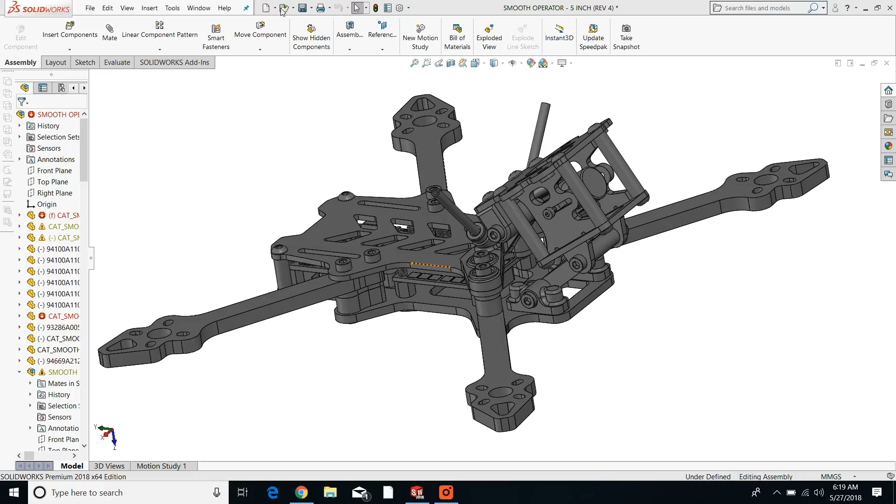Hey guys, this is Neil with Catalyst Machine Works, and I'm going to discuss some of the design aspects of this new bird that we are actively tinkering away with.

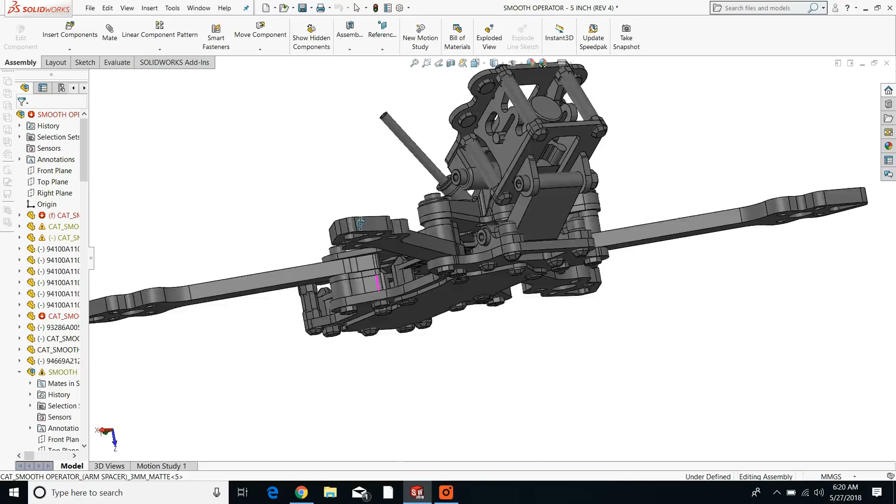Currently it's only in CAD form, we haven't started to manufacture anything. The prototypes are coming soon. I'm probably going to finish up this design by the end of this holiday weekend, get the parts cut for a few prototypes, so myself and team pilots can go thrash this thing and see what happens. So I'm going to discuss the major design aspects and what I'm trying to accomplish with this.

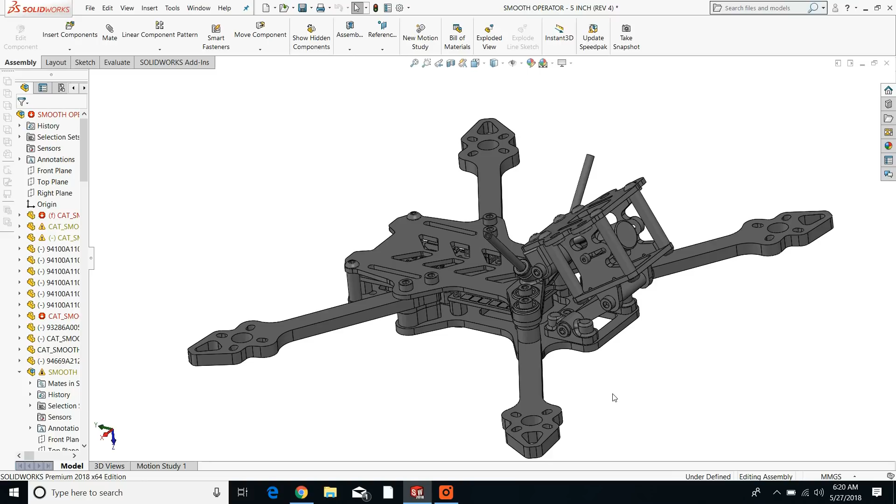One of the main aspects is I wanted to create a design that is highly resilient to damage for your expensive FPV camera and also the HD camera that's going to go up top.

Let me go ahead and show you what it looks like with the HD camera up top. I need to get a new computer, it's not keeping up anymore. Anyway, so this is what it looks like with a session up top.

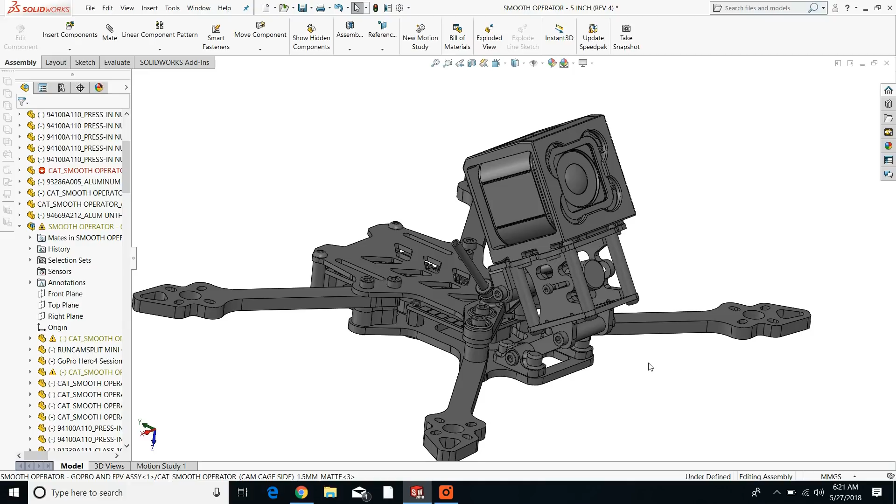Now the theory here, how we're going to keep these two cameras well protected, has to do with TPU and the amazing properties of TPU. That material, the reason frame designers use it primarily is, one, it's readily available, and two, it has some pretty incredible properties with regards to crashing.

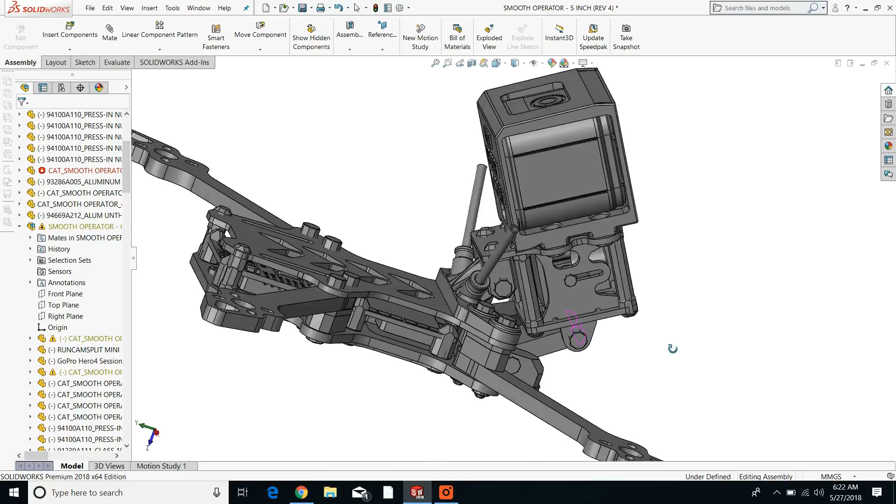What happens when you crash is that the material will move, deform, but bounce back into shape. So it doesn't plastically deform, it doesn't deform and stay in that deformed position. It'll sort of pop back into spot.

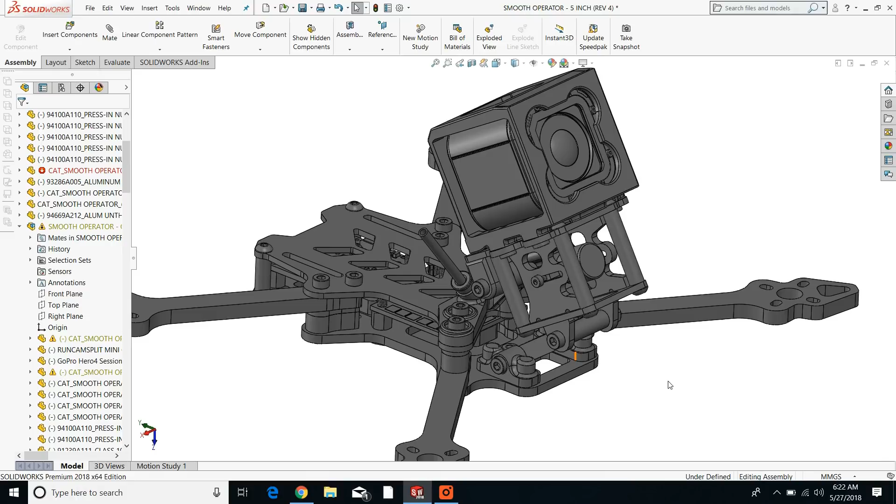And so I'm using those properties with this assembly. Let me go ahead and hide these guys so we can have a better look at this.

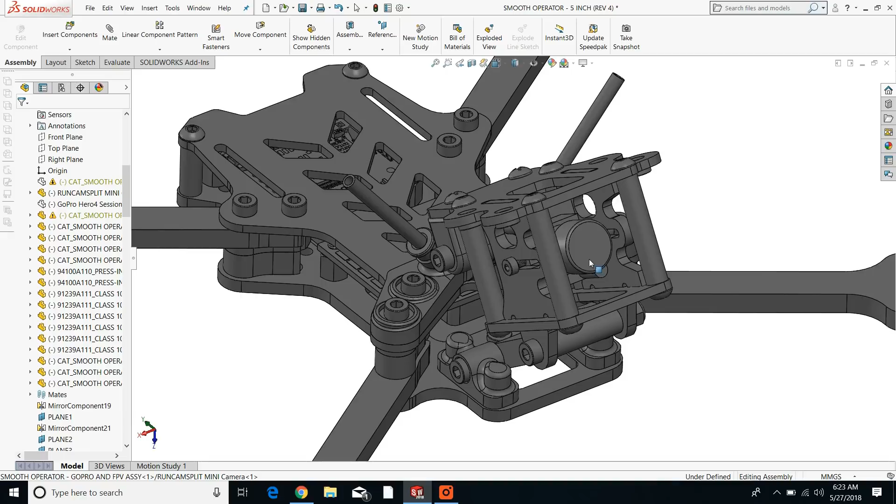Now how this thing works is it has a very rigid, very strong cage here for the FPV camera, and this is a micro cam in here. So this thing will fit really any size micro cam on the market, and in addition you can use ones with big lenses, like the Eagle camera for instance. So it's designed for that.

And this cage is mounted to the main structure by TPU components. So this bracket, these two brackets here, these are TPU. This bar will probably be TPU. We may use a material called armadillo, which is unbelievably tough, it just depends, I'm going to try both out.

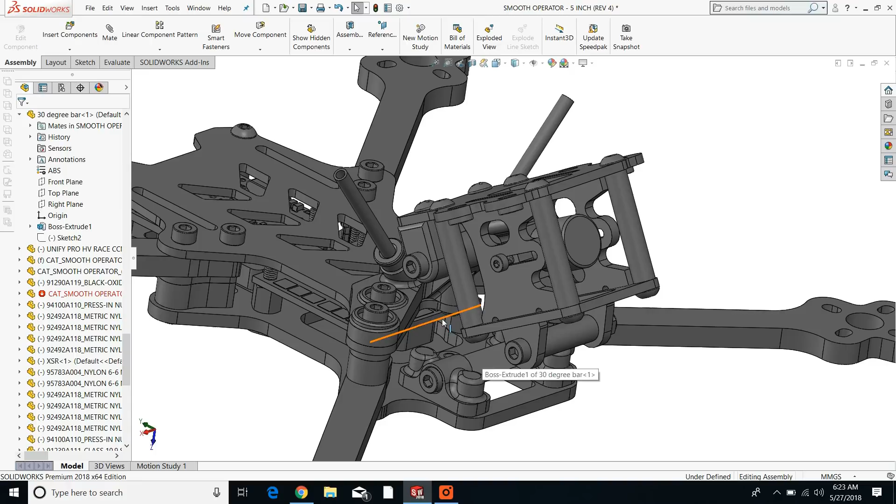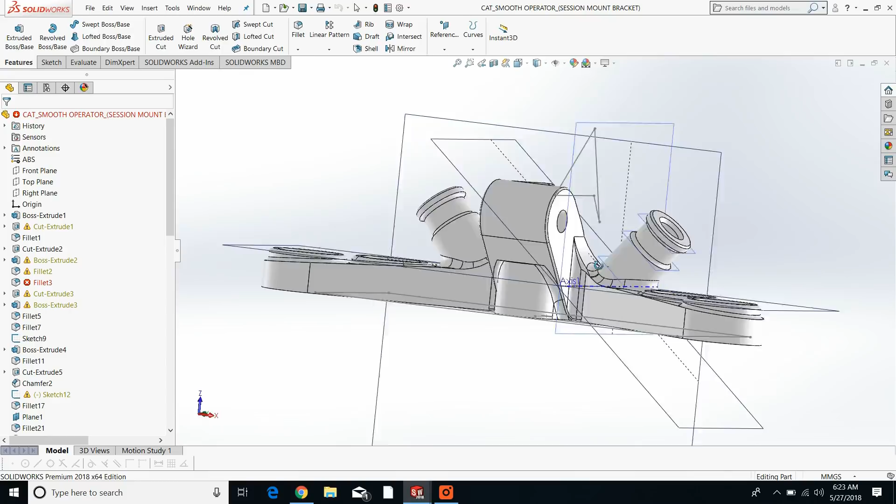But then this component here in the back, that the assembly hinges on, let me show you what it looks like. This component is also TPU. I've got a lot of planes and whatnot on here, but this entire component is TPU as well.

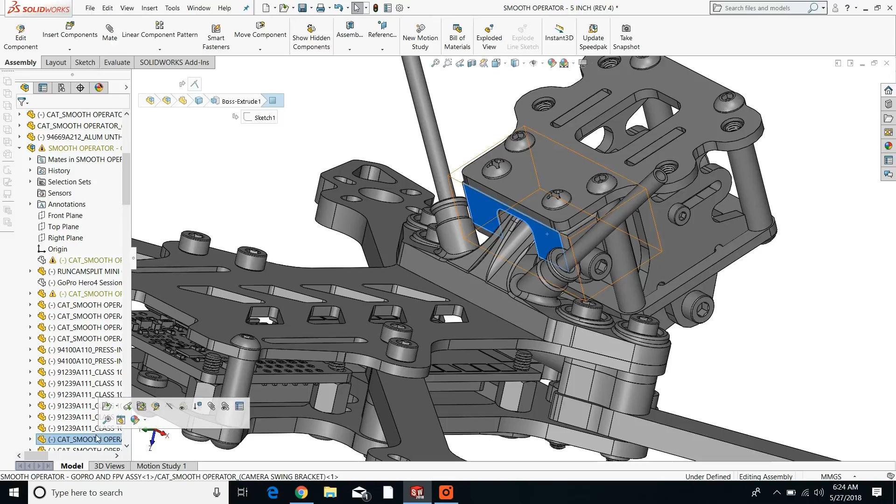Then this component that I haven't even named yet, whatever this thing is called, that the assembly hinges on, this is also TPU. Let me open that up. Okay, so this is TPU as well.

So how it works is that if we crash, let's say we smash this cage into something, the theory is that all of these components working together are going to deform and just move this cage out of the way. It'll essentially deform, dissipate the forces, and then sort of pop back into place.

Of course we don't want things in the process to be breaking, and that's what crash testing is for. So I've designed it in such a way that my intuition is telling me it'll be successful with the majority of crashes, and that it'll do what it's supposed to do. So we're going to get out there and crash test it and see what happens.

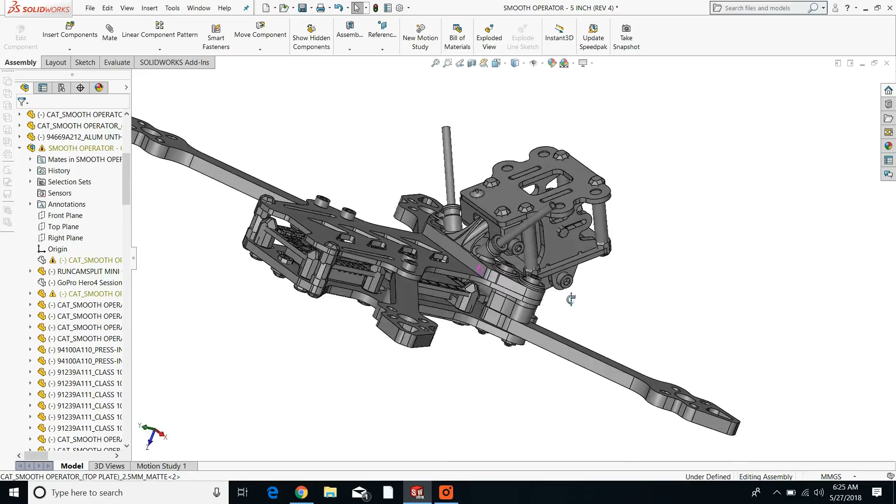Now, why didn't I go with just a big TPU canopy of some sort up here?

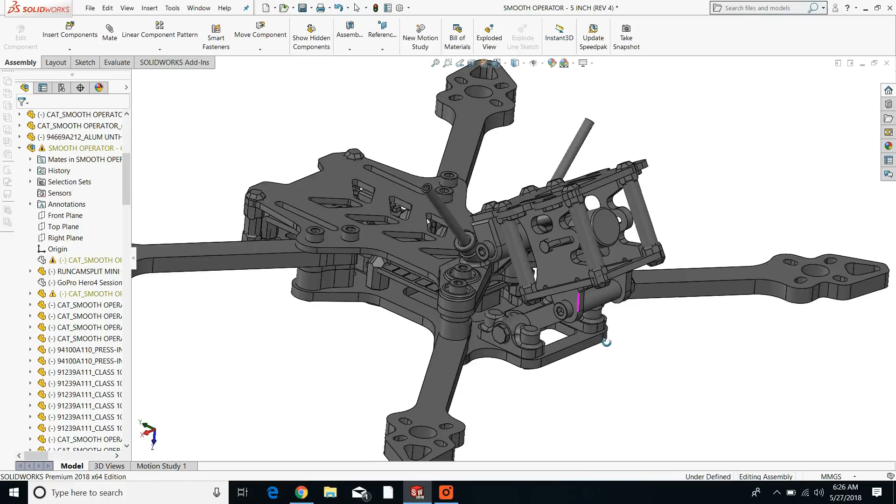We've considered that, and the reason I didn't go with that is that while a TPU system to hold the cameras can be effective, I think this is actually going to be more effective. What I've found is that a TPU structure is really great most of the time, but there are those cases where it deforms so much that it'll actually crack the case of the FPV camera, and that can be a problem.

So the theory with this is that we now have some of the properties of TPU working to our advantage, that deformation and being able to move the assembly out of the way in a crash. But we're also housing the camera assembly in a very tough cage. So that's the theory with that.

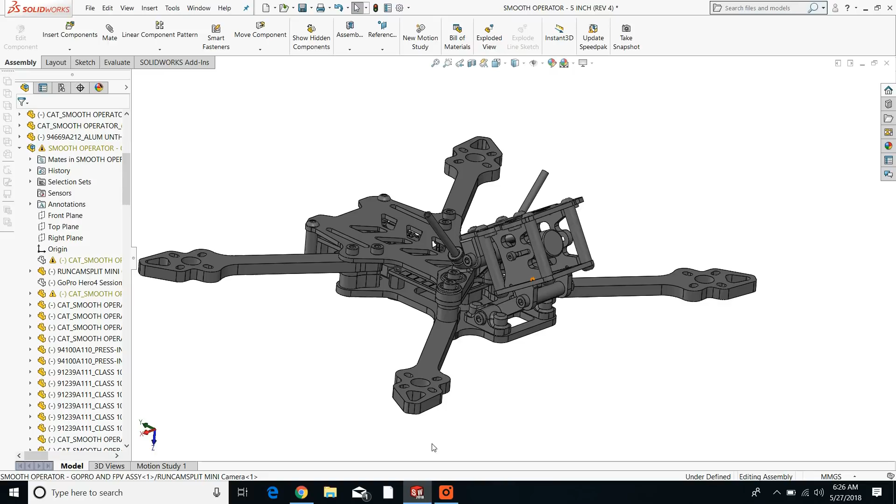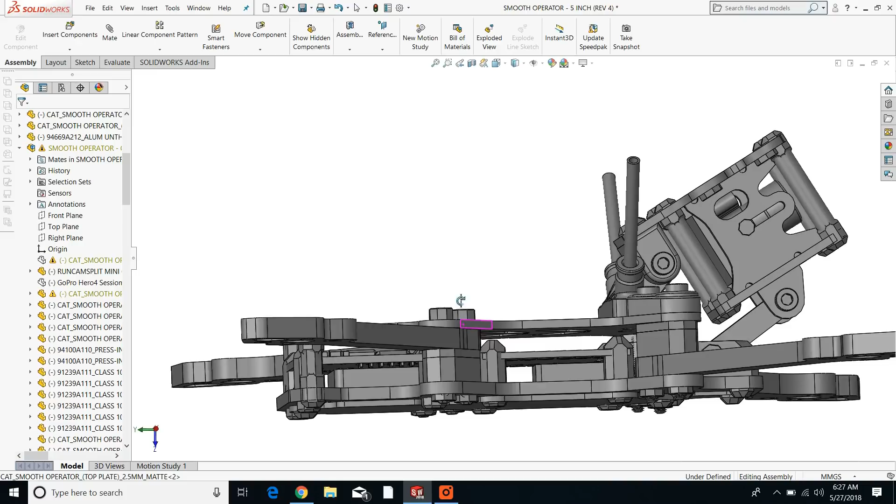Now, the other aspect of this machine that I wanted to go after was a super low deck, a fuselage that is very low slung. They just look cool, it looks really awesome, and the less distance you have from the top and bottom plate, the tougher the fuselage is going to be in a crash. And obviously you save a little bit of weight compared to something with tall standoffs and all of that.

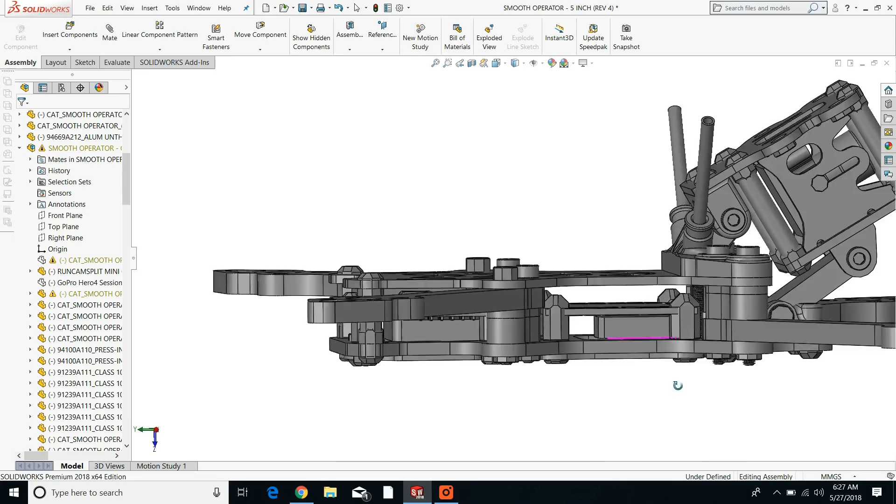So anyways, the way that this is accomplished, this is 13 millimeters top to bottom, and there's actually only one way that I was able to pull this off and get it so low slung, and that's this here.

This on the bottom is essentially just a cover plate, carbon fiber, 1 millimeter thick. If you look at this thing, it's held on with 2 screws, right here. You pull those out, this cover plate is going to come off.

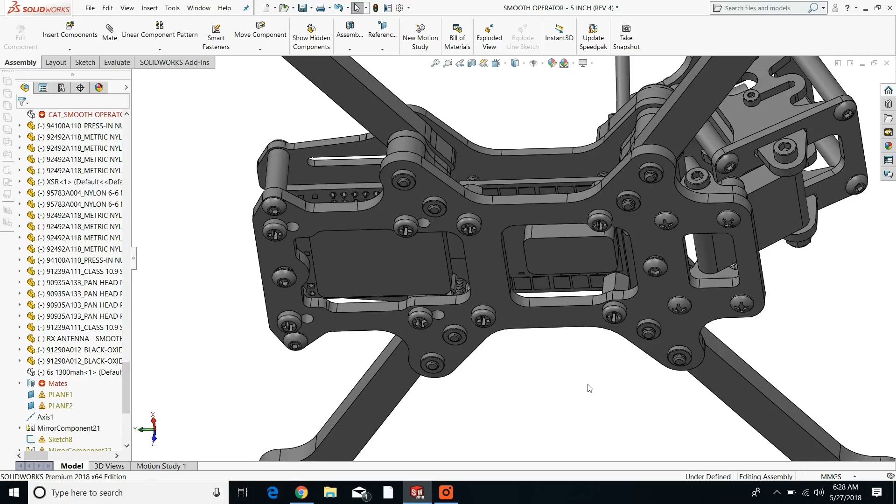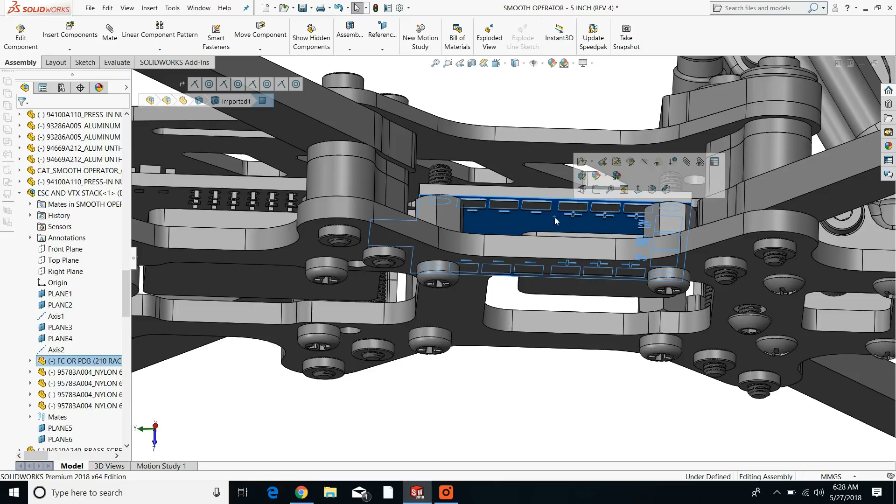Then underneath, you've revealed the video transmitter, which is here, and the RC receiver, which is there. Those are mounted in these, I'm going to call them bays. This is the bottom of the speed controller, the 4-in-1 ESC, and this is the bottom of the flight controller. You just use double-sided stick tape and mount them to there. There's plenty of room for these components.

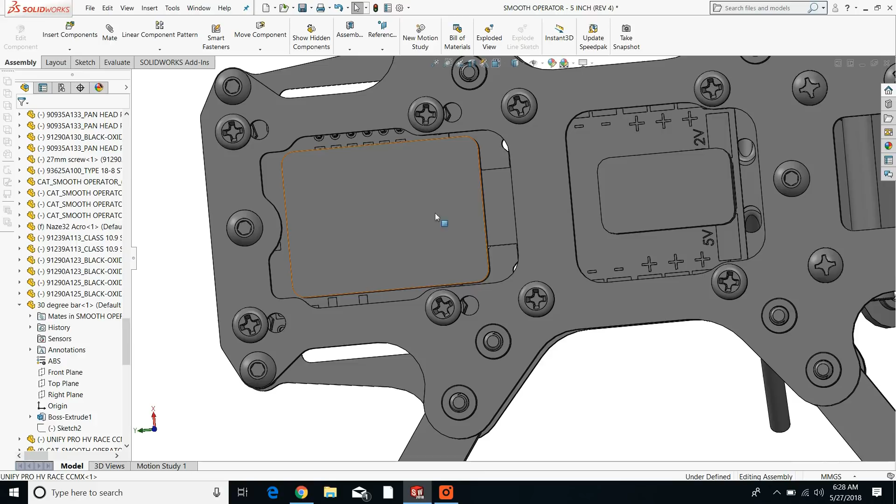This I've modeled up here is a Unify Pro, the race version, but it's the big one, the new one they came out with, the MMCX. So you can see it's pretty long, it's a big, flat, massive thing, and it fits in here with no problems. And of course you've got plenty of space for pretty much any receiver you can think of.

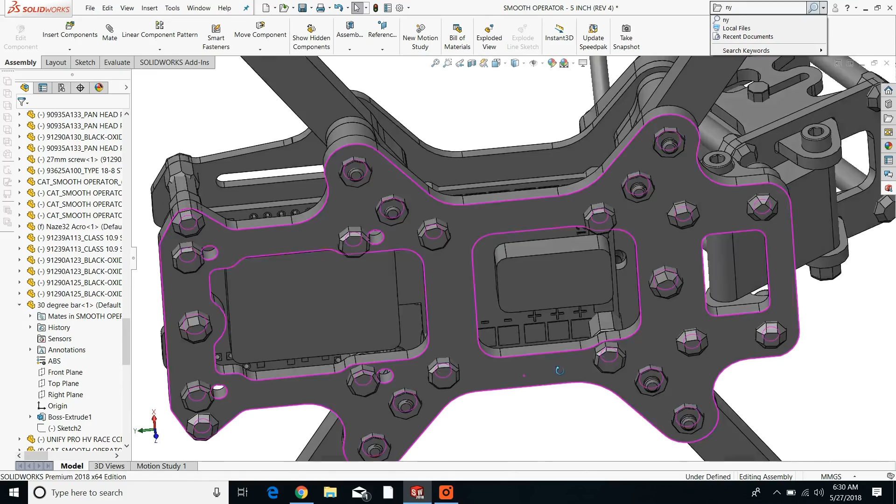One of the concerns that I've heard from people in our group who have seen this thing is access to the electronics. I mean, obviously that's really important. We go out and thrash these things, and the reality is things are going to burn up over time, and things are going to break, and you've got to get access to these components.

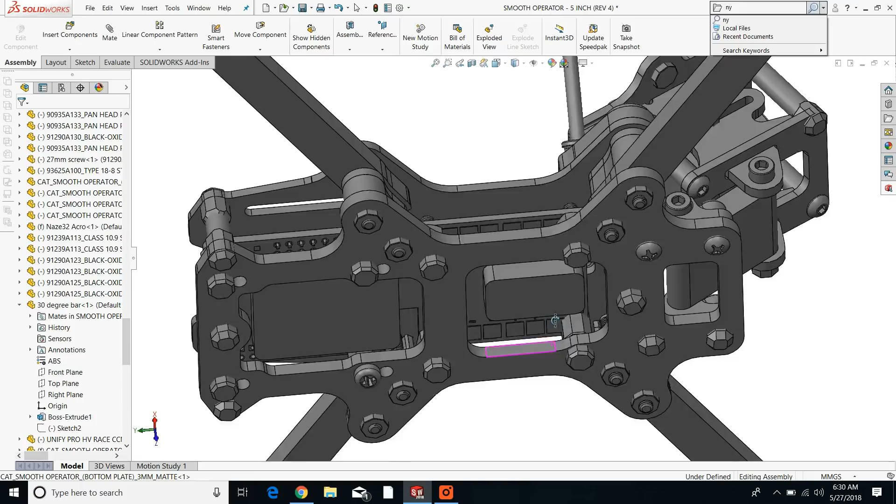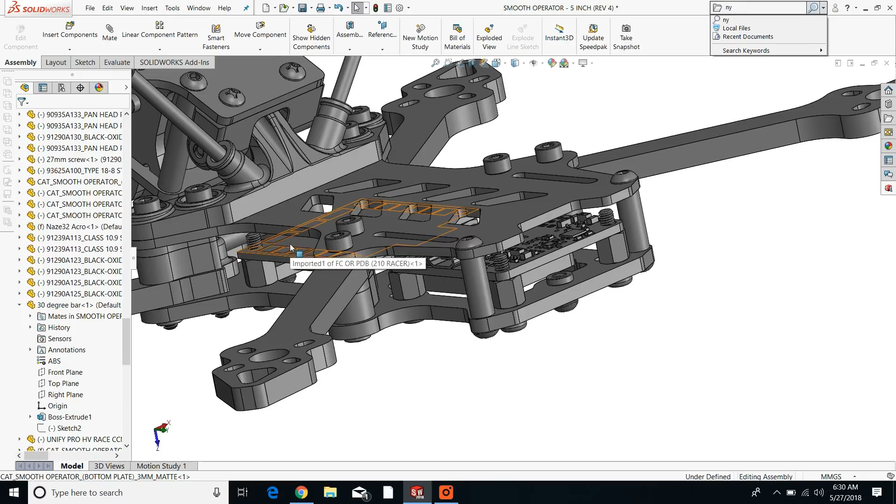So the intention of this, the way this thing works, is that it gives you easy access. Just 2 screws, and now you have access to these components. You've got access to the flight controller, not by way of these openings here, but just by where it's located — the flight controller is in the rear of the craft. It's not stacked on top of the ESC, it's not in the middle, it's in the rear. So just by way of its location, you can see that you can get to it easily.

Let me go ahead and put this cover plate back on here, wherever in the hell it is.

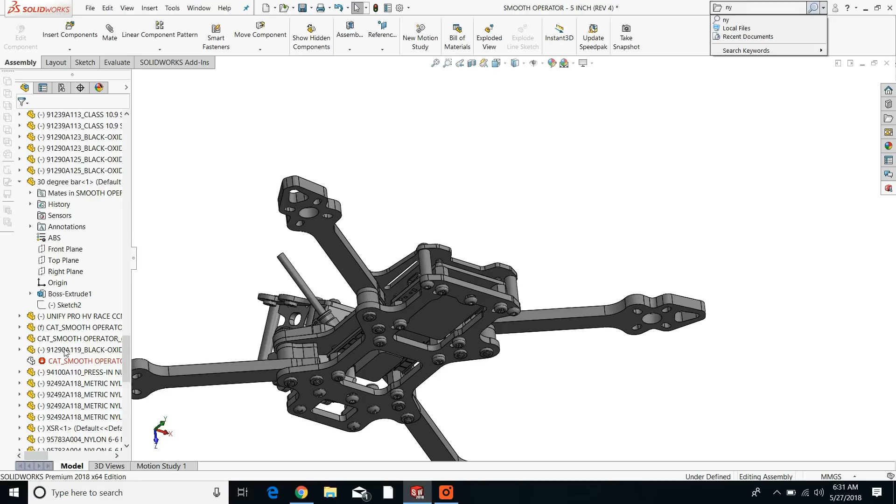Here it is. All right. Okay.

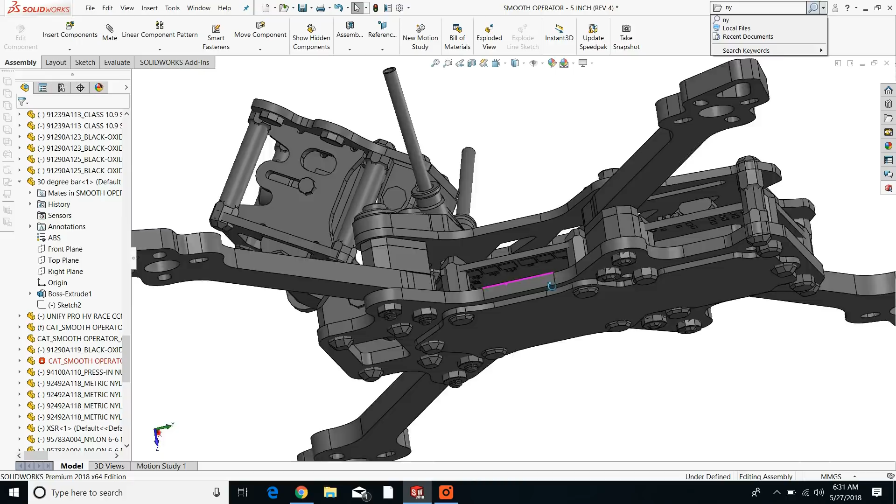So another aspect I'm going to discuss is the arms. Essentially this is an adaptation of the Merica line of frames. Through testing, and then once we got it out into the world and people started crashing it and doing all that, we found that the way the arms work and the way the fuselage interfaces with the arms just works out really well. It's a very popular design, so we're continuing it in this frame. It really hasn't changed - it works the exact same way.

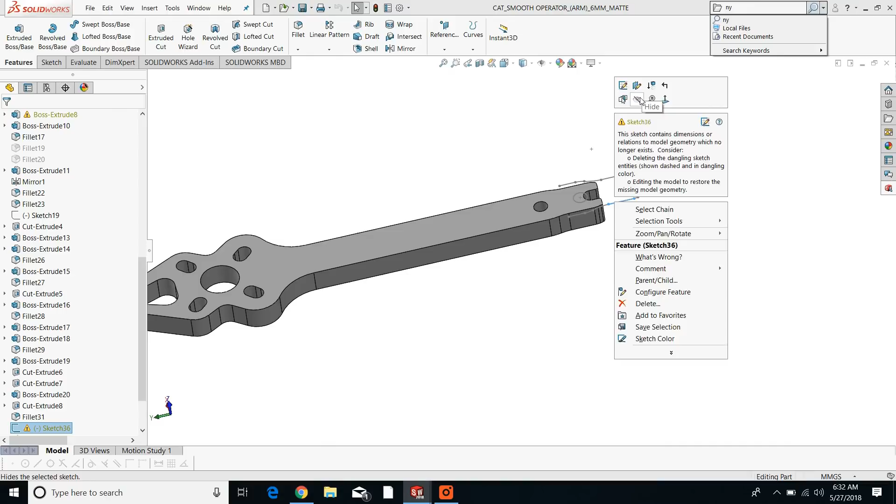So we have the arms here, and if you look at the arm, let's hide this thing - it's got a hole and a slot, like that. So if you break an arm, if you snap one of these arms, all you've got to do is take out this screw, completely remove it, then just loosen this screw and the arm comes out. It's super fast, super easy to get out of there.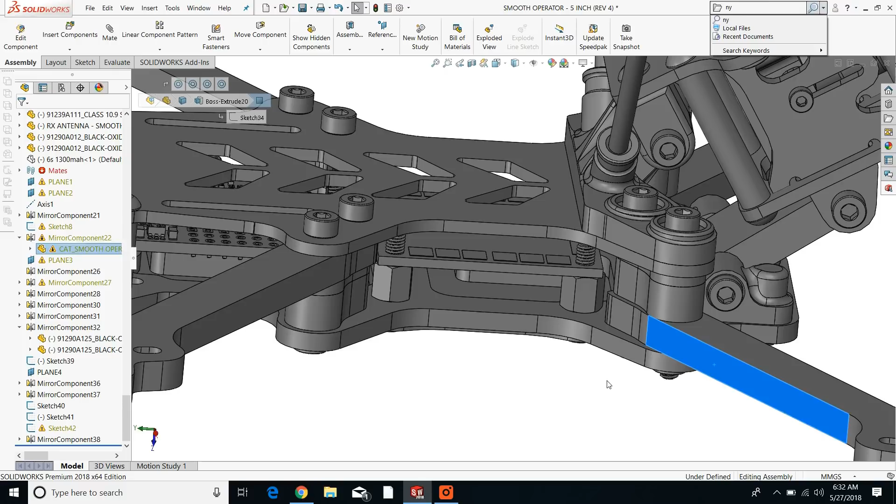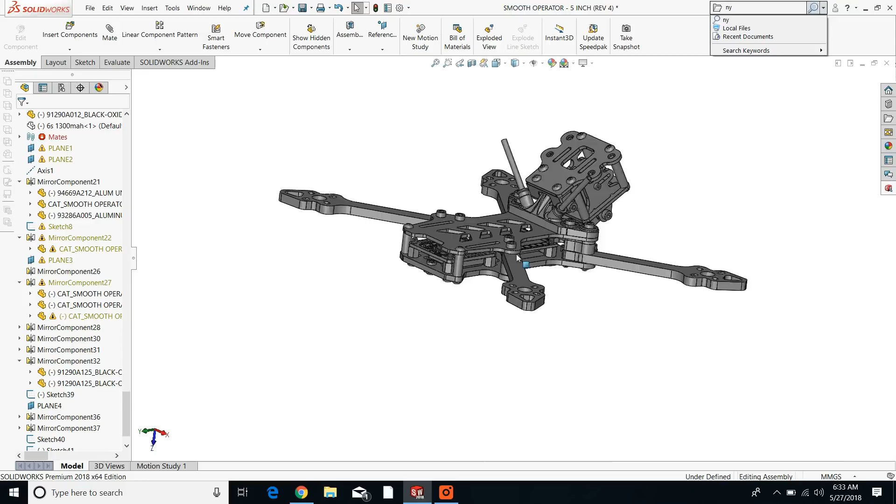Another aspect that makes this thing cool is that we use these carbon fiber arm spacers, and that allows you to get a staggering of the front arms in reference to the rear arms. So you can get the props of the two rear motors up higher than the front, getting cleaner air to the rear props and running a little more efficiently on those. That is how that works, and it has not changed from the Merica frames - it should be very effective.

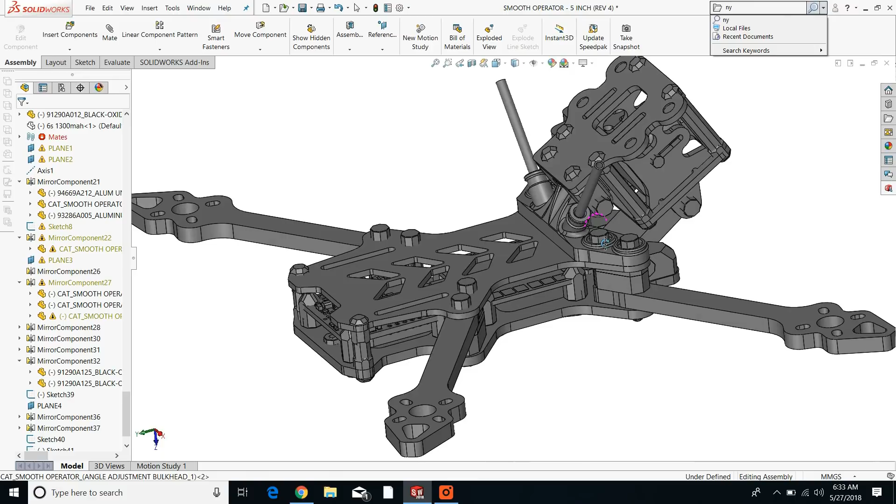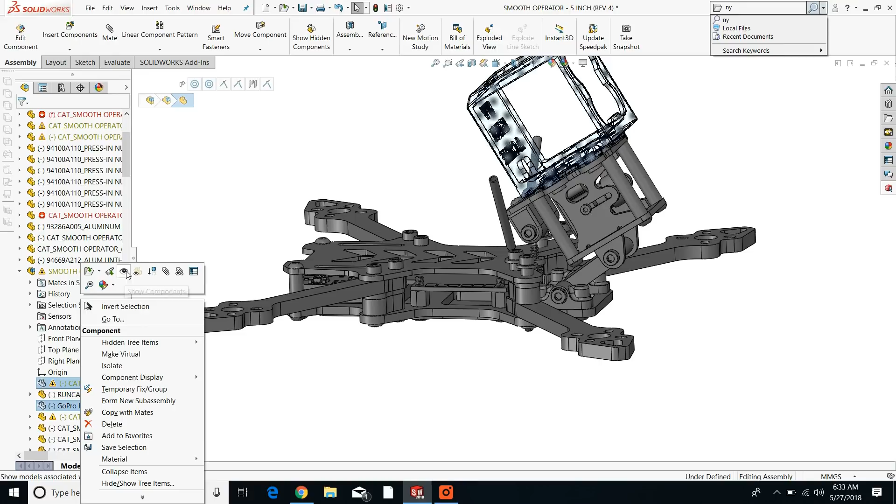Now, obviously, the battery on this guy is mounted on top. Another thing I noticed people mentioning is, wow, why does this top portion look so high up? Why is it sticking up so high? Well, it's not really sticking up higher than any other craft in this size.

The reason it looks like it's sticking up so high is - oops, we're missing a part here - the reason it looks like it's protruding up so high in reference to the other parts of the craft is that the deck sits so low.

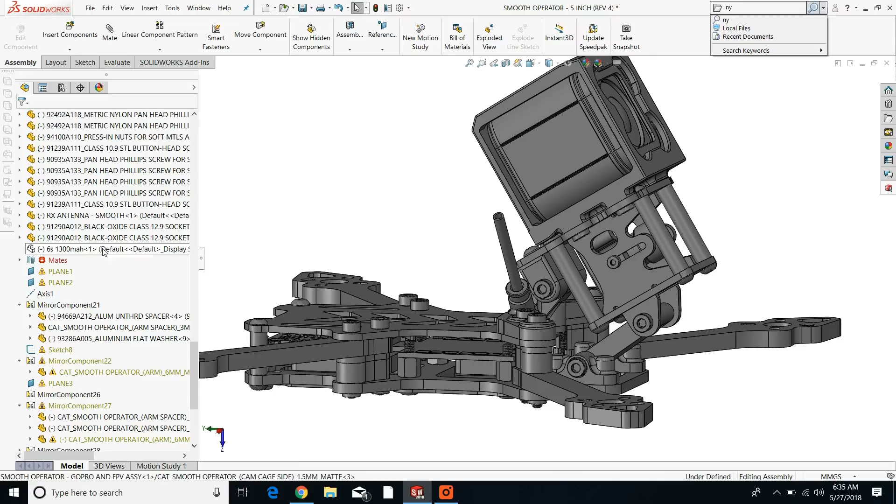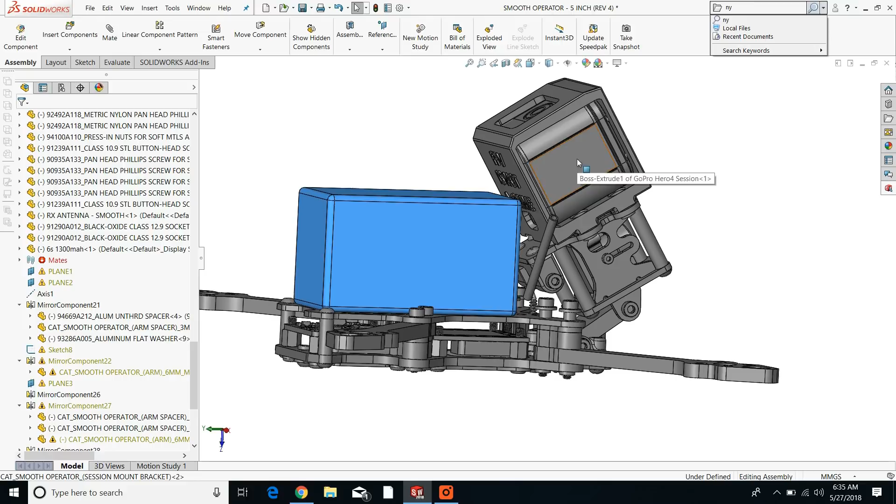So if I actually put a battery on here - this is what a battery looks like - you can see that if you compare this to, let's say, an Alien or an Armattan Chameleon or Rooster or something like that, the camera is sitting about the same location as those craft in the same general area. This battery I've got modeled up here represents a 6S 1300 mAh, which I think is a pretty worst-case scenario battery - it's a larger battery.

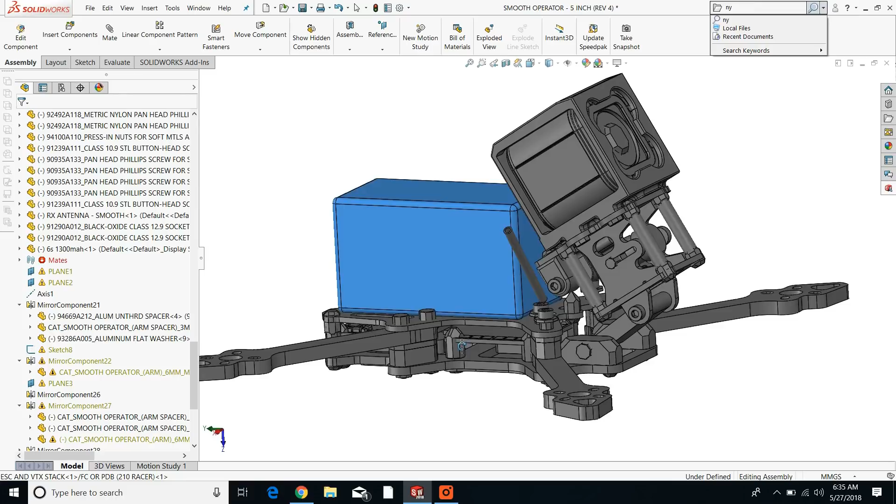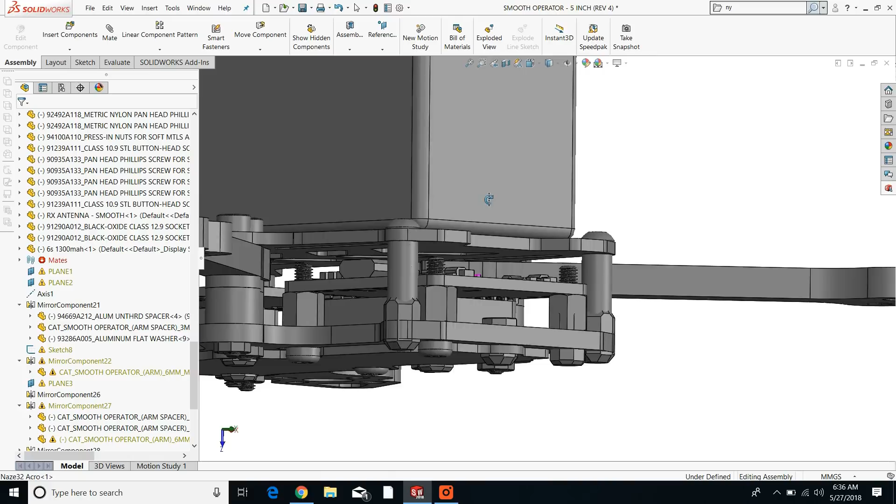The battery is actually held on by two straps instead of one. You've got a strap here that runs into these two slots and goes around here over the flight controller. Then there's a strap that goes through here and around the front of the battery, so it's held nice and tight.

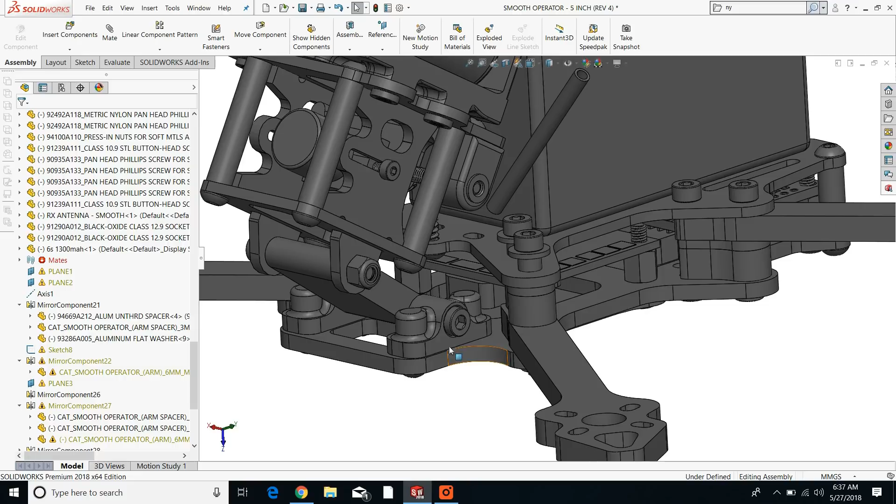Now, here's another aspect I wanted to discuss - the entire front section, by changing out the length of this bar here, will change its angle. So you can move the FPV camera and the HD camera all at one time just by changing out this bar. If you use a longer or shorter bar, which just looks like this, you can change that angle. This thing will be able to deviate anywhere from about 15 degrees all the way up to 50 degrees.

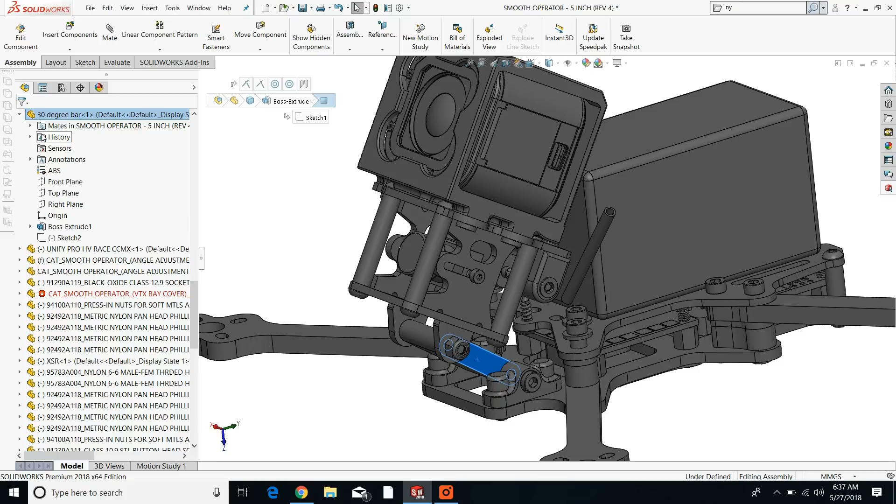Let me show you what it looks like when we change that angle. I'm just going to break this mate here. And when we change that angle, this is what happens - the entire assembly will rotate together, so you can see that.

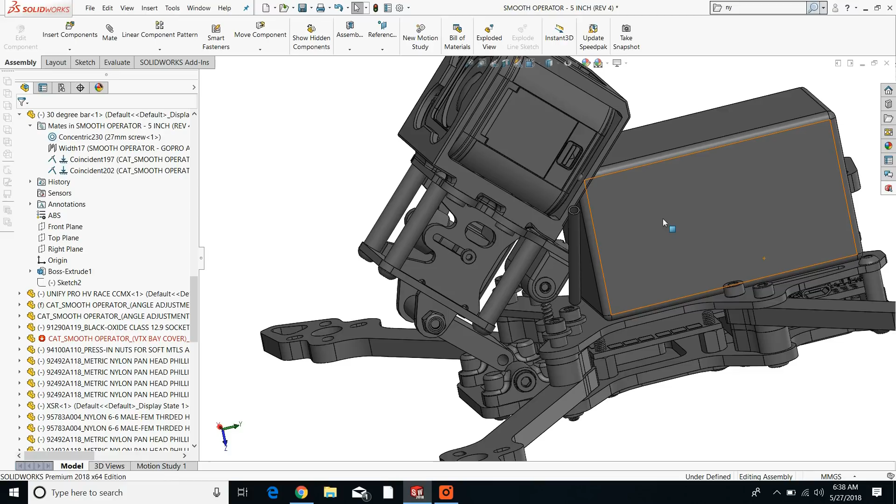So now if we go all the way up to 50, which is somewhere around here, you can just slide this battery back just a little bit. You're still on top of the fuselage here, you're not hanging off the end, and you've got plenty of space. You can get a really decent, significant amount of camera tilt.

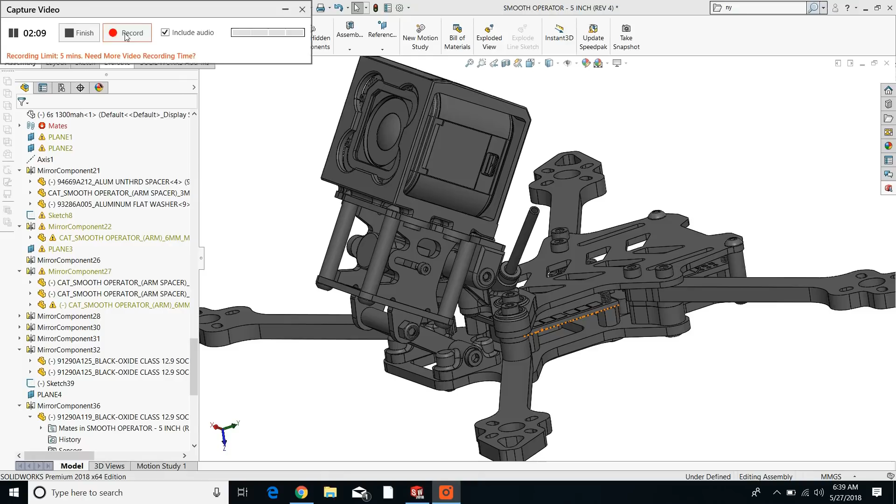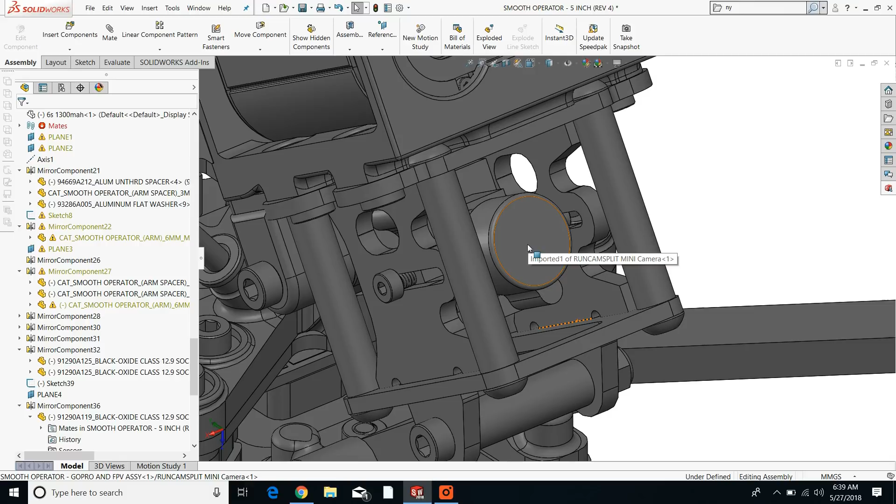Alright, so that's how that works. Now, some people want a different angle on their FPV camera relative to the HD camera, and this little cage allows you to do that. You can change the angle of the FPV camera by around 15 degrees plus or minus.

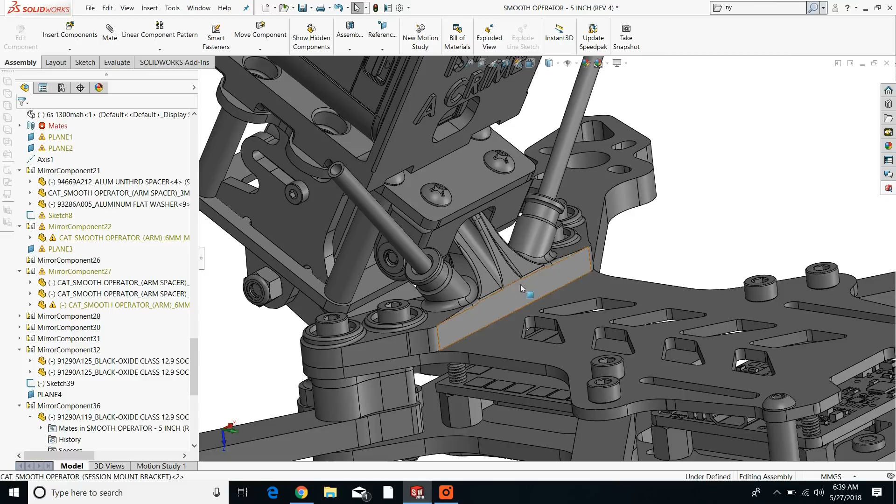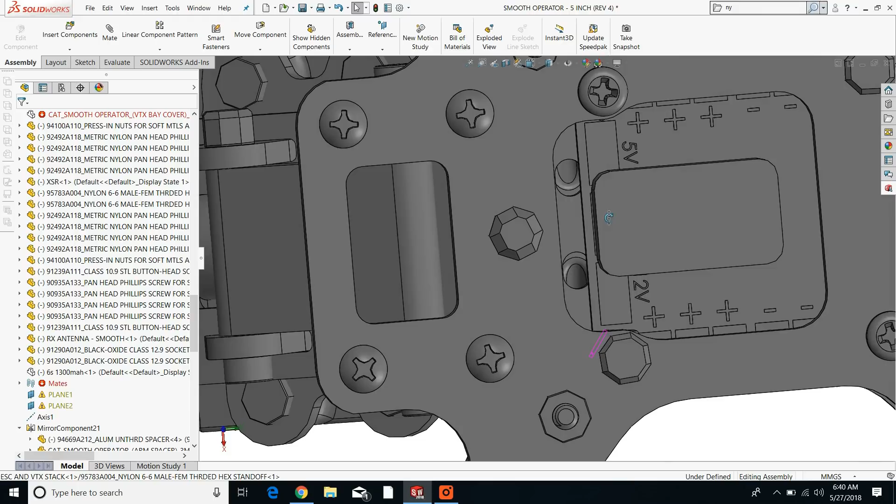I wanted to also discuss the RX antenna for the receiver. The antennas are integrated into this TPU component here. There are little holes at the bottom that you run the antenna up through, and here's your receiver. If I hide this guy, I'll show you how it works. There's a little opening, and you just feed the two antennas up through here. Pretty easy to do.

These antennas, because of their location, are well protected in a crash. If you crash and roll this thing over, the ground is never actually going to touch these things, so those should work out pretty well.

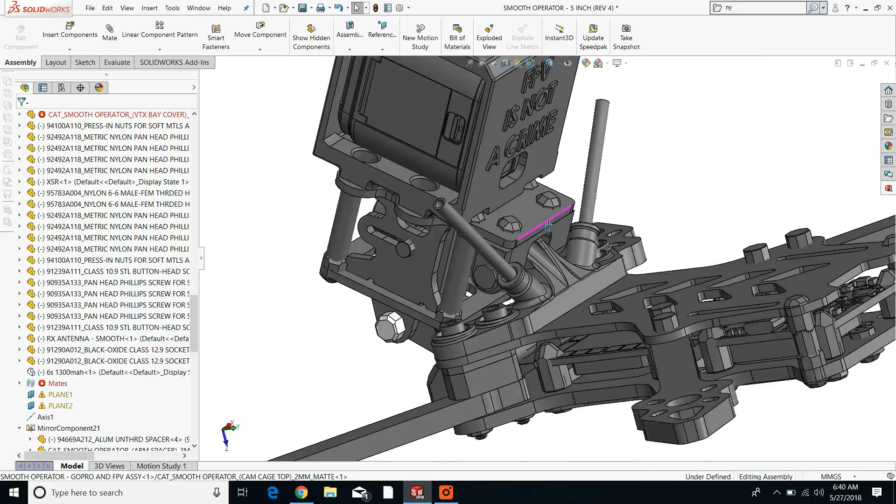I'm also going to come up with some sort of mount for the crossfire antenna, I think it's called the Immortal T, something like that. I haven't done it yet, but I am going to integrate that somehow into here.

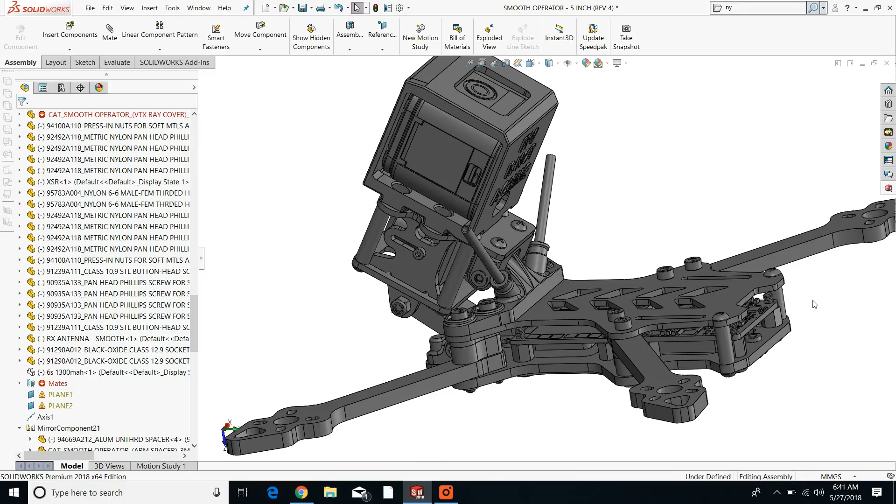The next thing I've got to do, which I haven't completed yet, is make a mount for an SMA style FPV antenna. That's going to be in the rear of the craft. It's going to be some sort of TPU component that holds onto these two standoffs here.

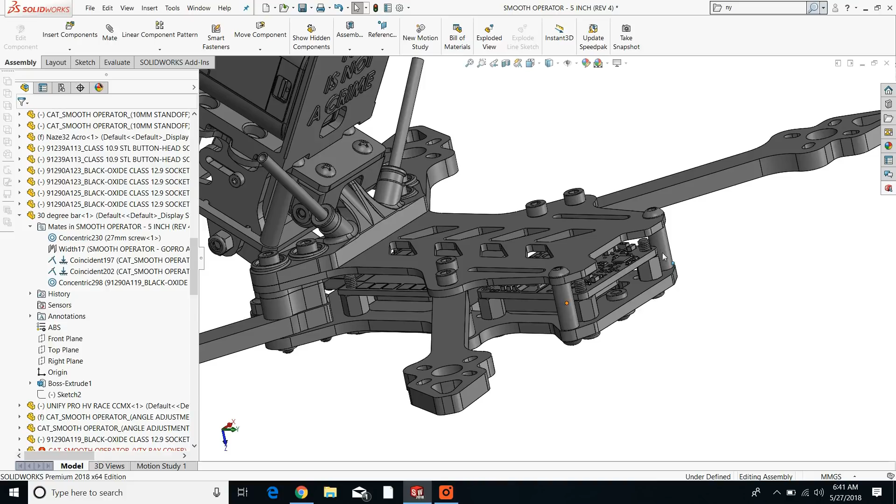There'll also be an option for a TPU mount for an Axii style antenna on the rear of the craft. So that's how that's going to work.

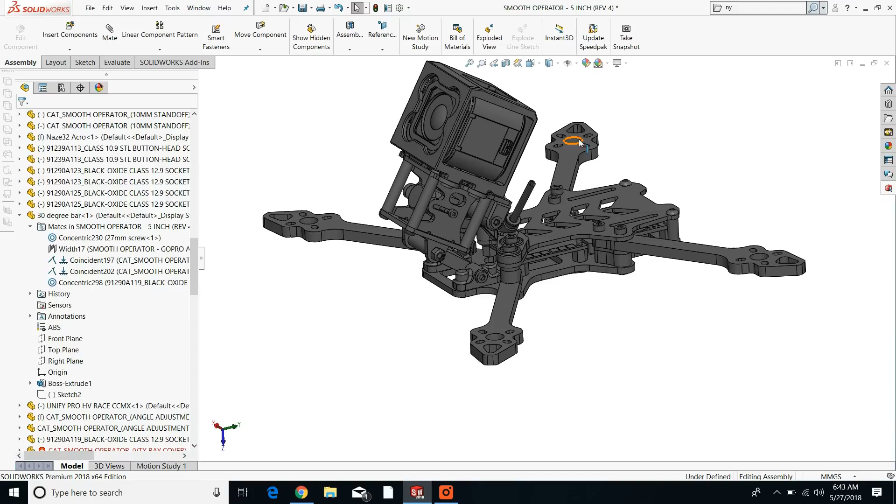There'll be an optional rear brace that you can purchase as an additional accessory.

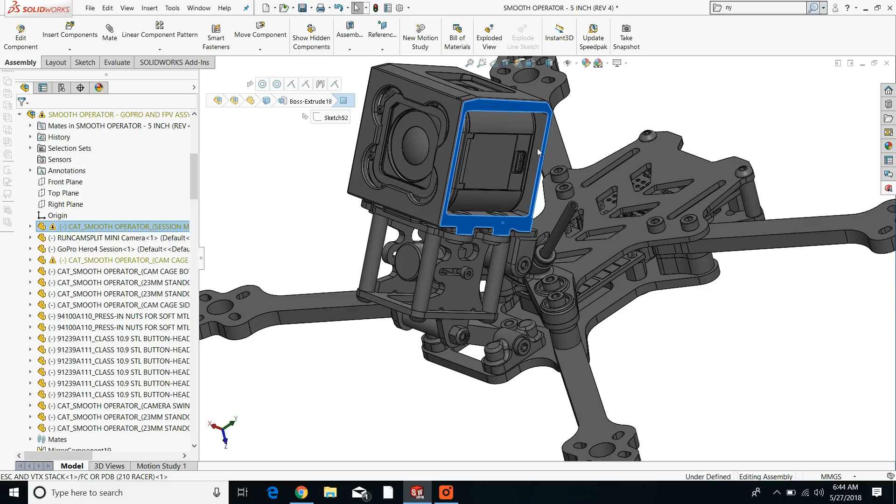The last thing I'll mention is the cameras. When you purchase this, you buy the frame, then select what type of HD camera mount you want, which is sold separately. At the beginning there will be two options: what you have here, which is a session mount, and then also a camera option to hold the regular size GoPro. Let me suppress this here to show how the camera mount is fastened.

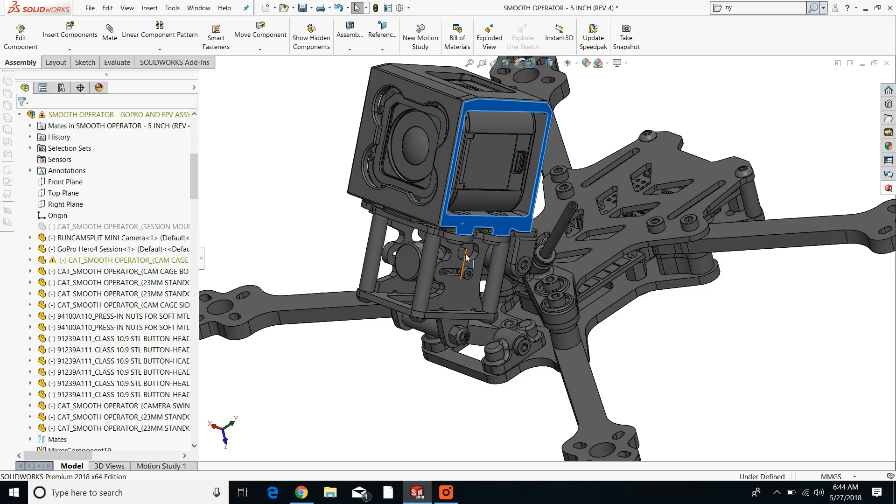There are some captured nuts here, and screws that run through the mount and join it to this plate. Since this thing is modular, it's easy to have different HD cameras mounted to the top of this thing.

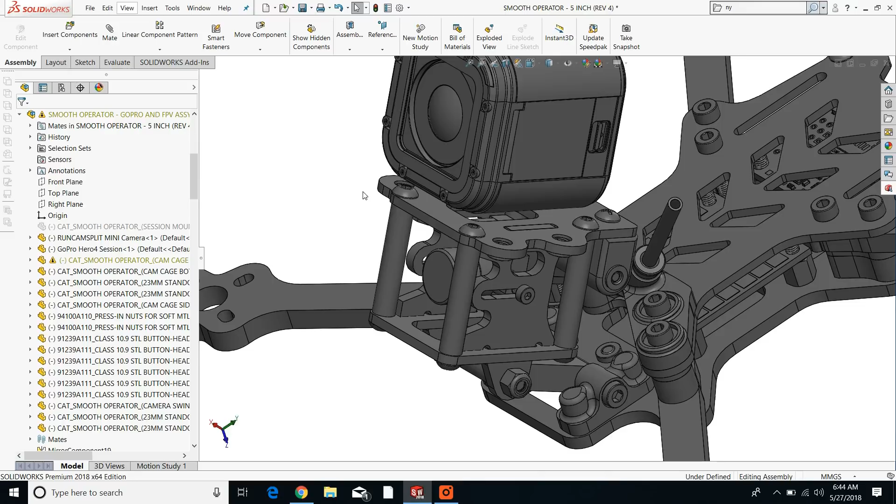So that is this design in a nutshell at this point. I'm excited to give this a go, get some prototypes, and start crash testing, flying, and tinkering with it. It's going to be fun, it's going to be a blast. I can't wait. We are obviously trying to get heavily into the freestyle market.

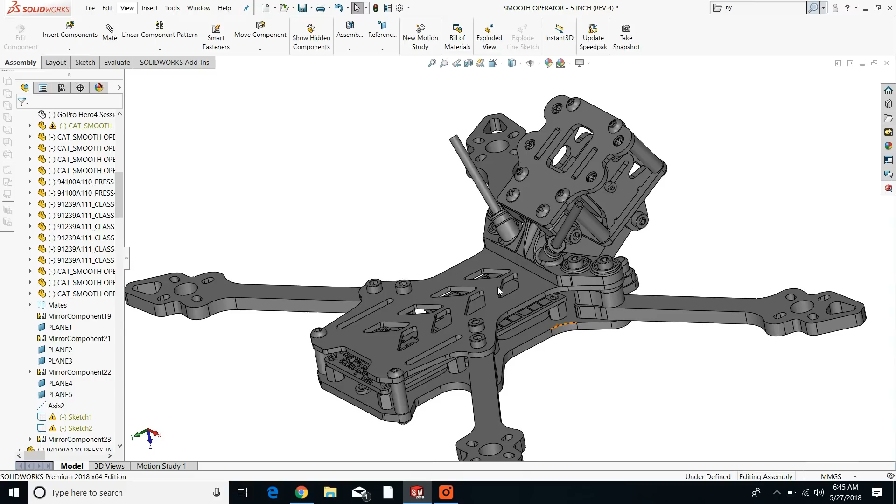We've had a freestyle frame for a while now, the 210R, which has been popular, but we needed to spice things up and move into some new technologies that I've been thinking about. So here we have it.

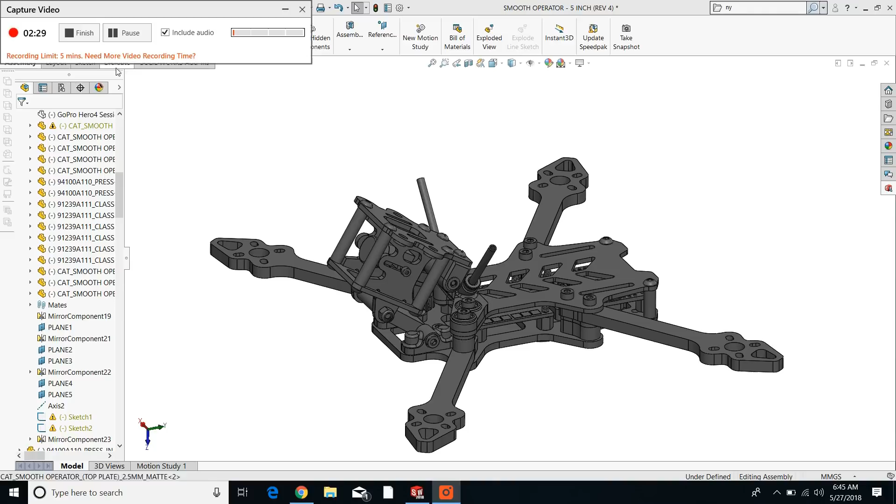I'll let you guys know how it goes and how things move along. We're probably at least about six weeks off from starting to ship this. We've got a lot of work to do. So there you go, hope this video wasn't too terribly boring.